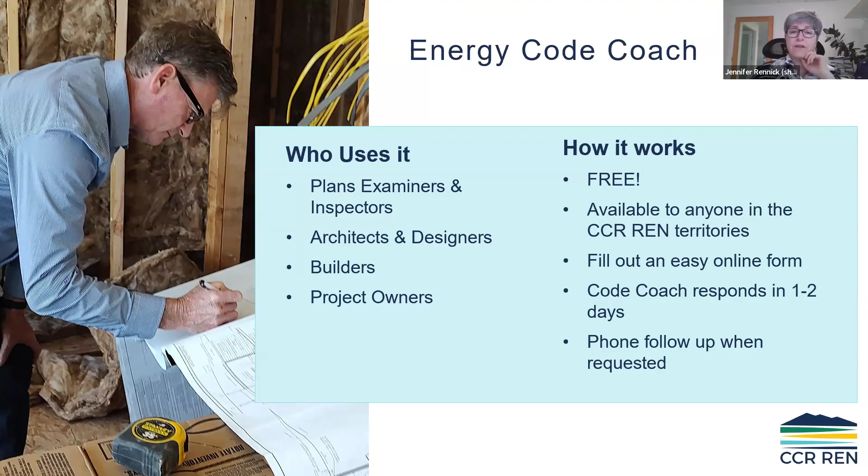Please use it, reach out to us if you have any questions. You'll fill out a form online, that's one way to do it. Then our code coach will respond to you in 1 to 2 days, and we will do a follow-up phone call when requested or needed. At the end of the slide deck, I'll have the website and a reminder of how to reach us through the code coach service.

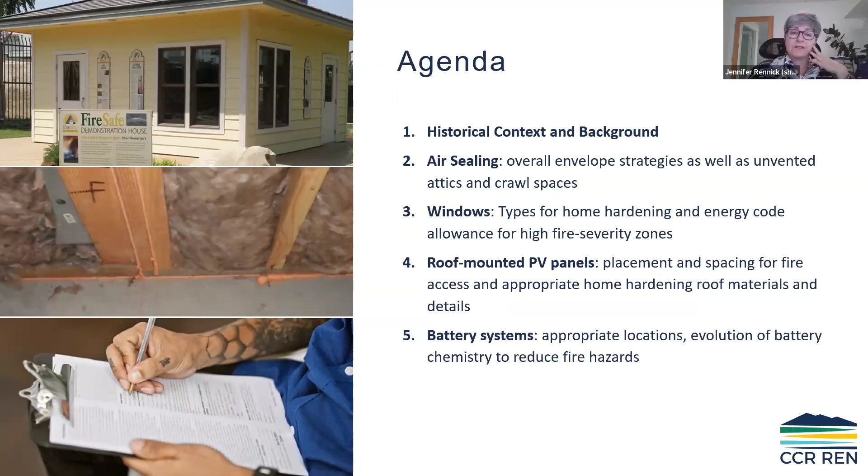With the California building standards, they're labeled as 12 parts right now. As an architect, I use a lot of these codes extensively, but today we'll primarily focus on the energy code. It overlaps a lot with the building code and residential code—with all of them—but there are things specific to fire safety and energy use in the residential code and Part 2, the California Building Code. Part 9 is the California Fire Code, so we'll talk a bit about that.

New to 2025, Part 7 is currently vacant, but there's going to be a new code taking its place where we've taken parts and pieces from all these other codes and put them into one place, hopefully helping us really deal with the wildland urban interface code—specifically for high fire hazard severity zones.

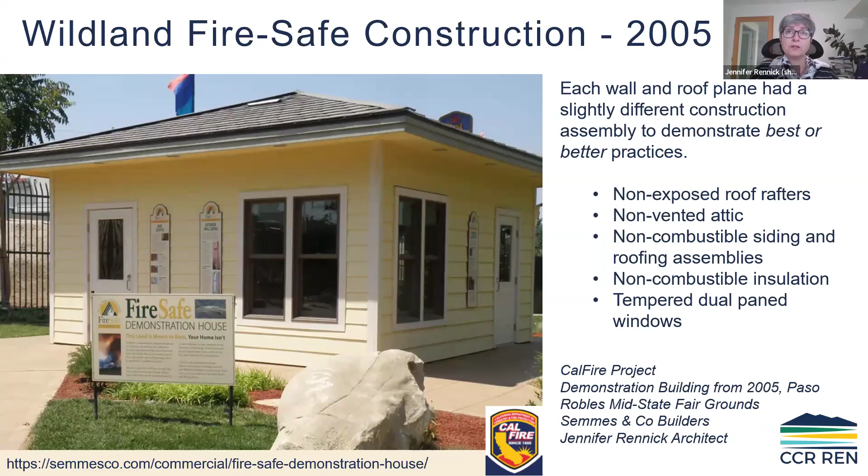Many of those features have been included in projects, but we also learned over the years better ways of building non-vented attic and roof assemblies, which are now actually in Part 2.5 of the code, which we'll touch on in the next few slides.

One of the big takeaways is to avoid thermal bridging, using materials that create thermal barriers. We want to avoid through framing at decks, balconies, and roof rafters coming out, and flash with fire rated products.

We want to use non-combustible materials like fiberglass reinforced exterior gypsum underlayment at metal roofs, and even on exterior walls under siding. You could use stucco and cement board as non-combustible siding.

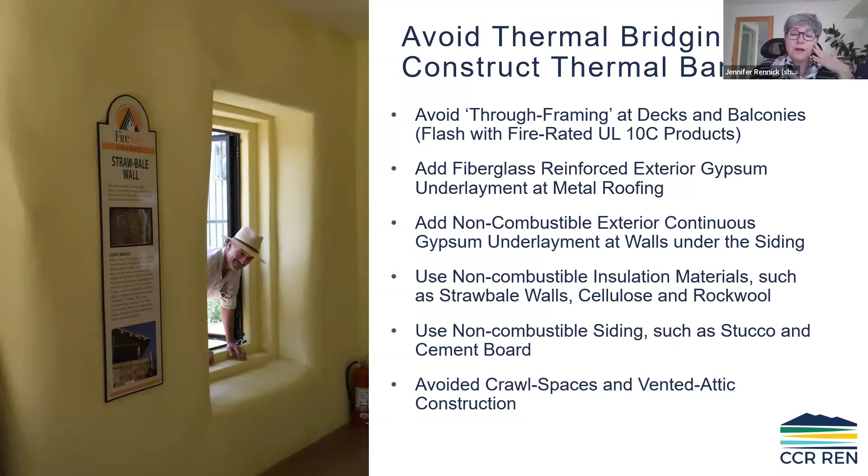We would look at crawl spaces and vented attic construction, avoiding crawl spaces by doing slab on grade construction, as we addressed it back then. We would minimize large vented attics, although you need a vented attic to meet other parts of the code. Since then, we have better tools and better products on the market to vent attics and crawl spaces.

And we've learned that requiring wire mesh of a certain thickness, greater than 1/16 inch diameter, and keeping those screened openings no greater than 1/8 inch in diameter, did a lot to help stop firebrands, which are burning embers, tiny burning embers, from being sucked into these spaces, into our attics and crawl spaces. Vulcan Vent, for example, has come up with products where they've coated the matrix behind the vents with a specialized coating that, when it reaches a high temperature, expands and seals off all of those little openings that allowed for ventilation.

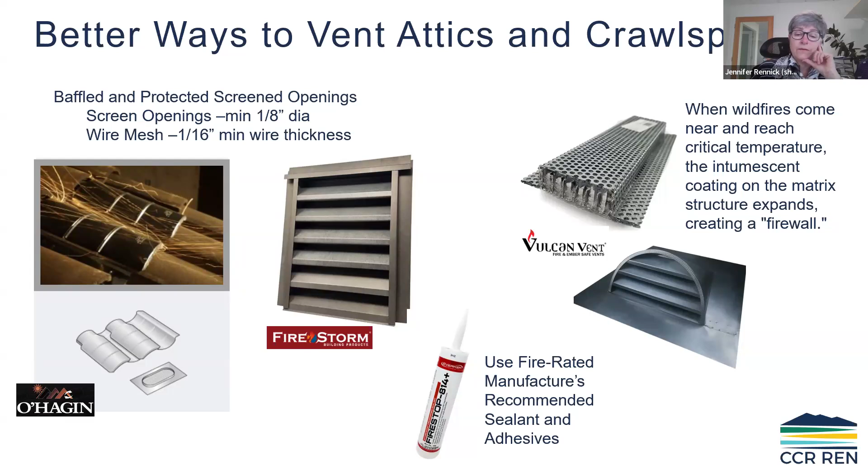So it essentially creates a firewall. And now we have better fire rated sealants and adhesives, and it's recommended that you use those types of sealants and adhesives when you're installing your fire rated ventilation system.

There's also been some improvement for the underlayments for metal roofing. Sheffield Metals has come up with a new product called their titanium underlayment that you roll out under a metal roof. But previously, and this is still valid, you would use a fiber reinforced glass mat, or fiberglass mat type X gypsum product, 5/8 inch, under your roof to get a metal roof a Class A fire rating, or you could use some of these products on the walls just to add another layer of protection for that thermal bridging.

Now, that's kind of the big picture strategy we were using to help stop firebrands from lighting your house on fire. So what this would look like is maybe there's a wildfire, or maybe somebody else's house is on fire, and pieces of their burning house would be caught up in the winds, and those embers can travel very, very far, and they would land on people's roofs.

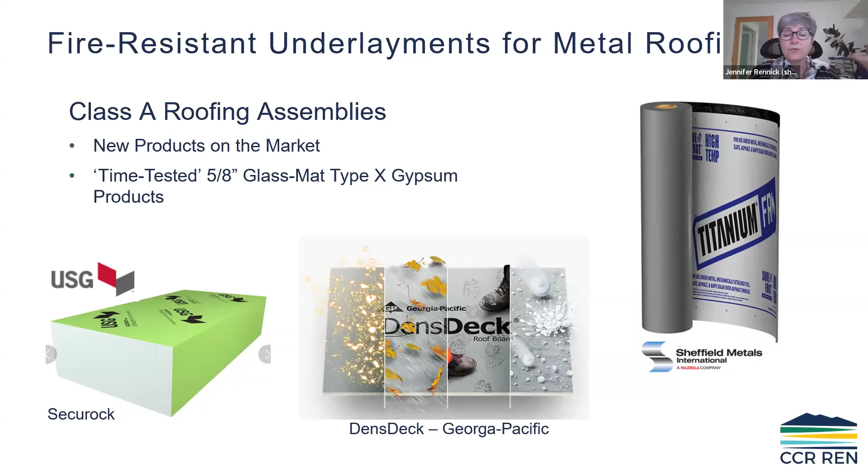And even if the roofing product itself was non-combustible, the heat transfer through that product would catch the wood structure, like the plywood, the wood framing, on fire. It would transfer that heat and start to catch those products on fire without actually having fire go through it. Also, those tiny firebrands could get sucked into the attics or the crawl space, or into the normal kind of cracks, crevices, and gaps in construction that we'd think of back then as normal.

So where that energy code and fire safety start to overlap is air sealing. The energy code got better and better over the years, which meant better insulation and better installation of the insulation, known as quality insulation installation, or QII. And then HERS raters were introduced into the code as well, which in 2025 is going to be called ECC, for Energy Code Compliance Rater, just FYI.

So our HERS raters would come out to a home and do the QII inspection, and some of the things they'd look for is: did the insulation meet the R value, the thermal value, and was the house air sealed? The air barrier, kind of air sealing, has been a part of the code, but really it's only been more recently, with the HERS raters going out and doing on-site verification of the insulation and the air sealing.

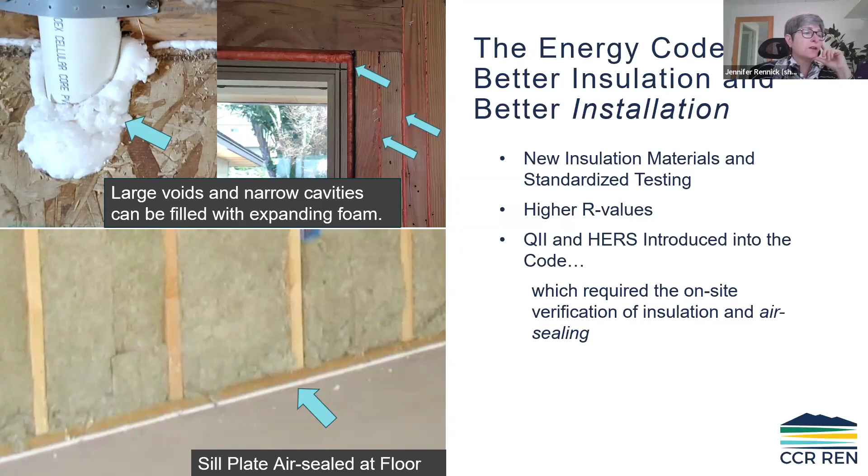So as this conversation's changed for air sealing, we can kind of look at this now in terms of materials, individual materials, or look at it as a whole assembly. And so even though in the code we know a continuous air barrier is needed, a lot of times people say, okay, my drywall taped and sealed, that's my air barrier. Or they might say, okay, I put Tyvek on the outside of the building, but the Tyvek can flap around. It's not really adhered to the rest of the structure.

And each of these individual materials may qualify as the continuous air barrier, but it's really the connection between the different materials that is where we need to really be looking for effective airtightness for our energy code, but also for fire safety.

So embers, because they can enter in gaps as small as an 1/8 inch wide, it's really critical that we start to seal the places where different materials join each other.

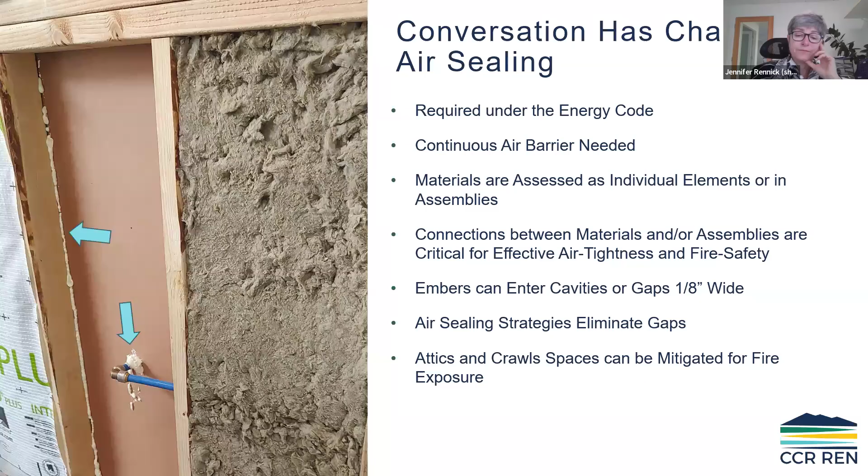Some of the ways we could do that is by foaming the joints between members. So in this photo on the left, you'll see a kind of reddish pink foaming product between the blocking and some of the studs. When it's that reddish pink color, it's a fire rated product.

We want to seal the penetrations when ducts or exhaust fans are penetrating the outside of the envelope. That should also be sealed. And we want to avoid creating framing cavities.

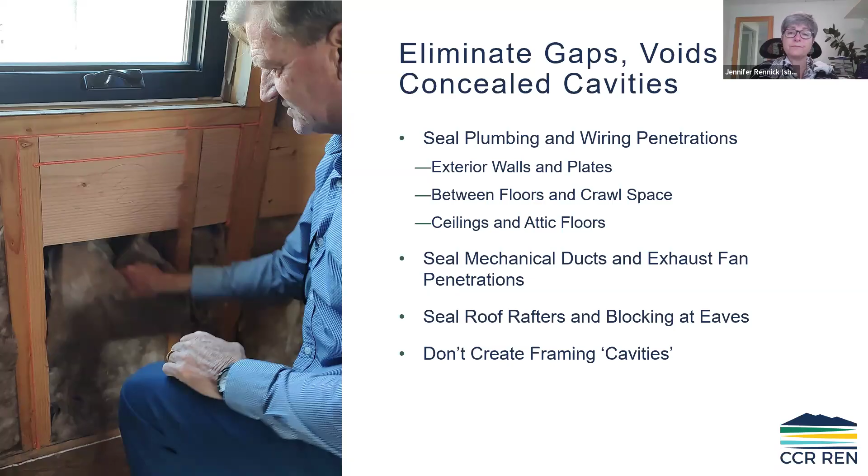So some of those kind of airtight, quote unquote, hotspots that we look for to help with the energy code, but also help with fire safety, is the air barrier on the outside of the building. We like to adhere it to the foundation itself, just below the structural sheathing. There's a few different ways you could do that.

All those seal that classic gap in most people's homes, especially older homes. They have a huge gap where the siding, the plywood, the foundation, and the sill plate all kind of overlap and don't actually meet or create an air barrier. So we try to eliminate that.

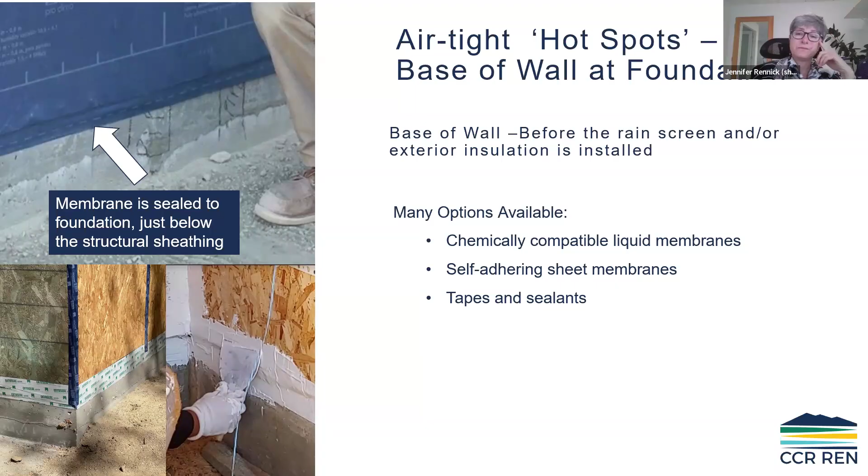Some of the other places that are a hot spot: a lot of times when it comes to drilling through the structure for conduit or wiring and other electrical and ventilation materials, the builder might go in and drill one large hole. One large hole, putting a lot of wires and conduit through it, creates a situation where it's almost impossible to air seal.

A lot of these products are having to go to the outside of the envelope and back into the inside of the building, and so now you've created a situation where there are a lot of gaps. So it's advised to drill individual small holes and then use your fire rated foam sealant and seal each penetration individually.

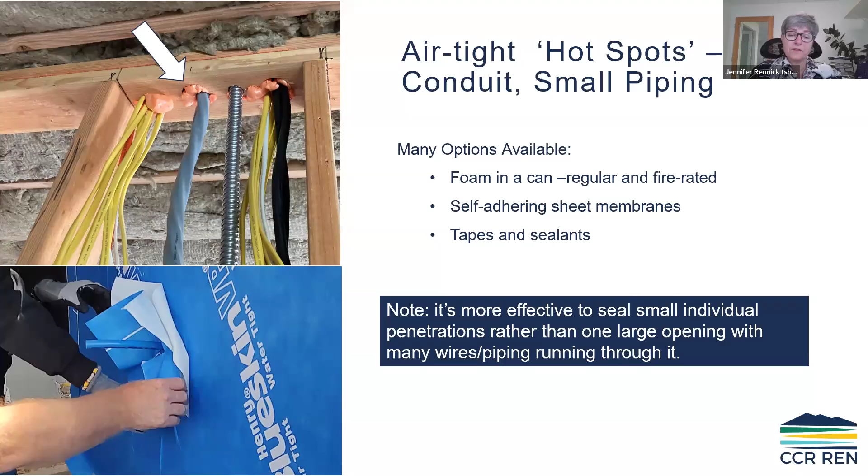There's also specialized self-adhering membranes you can use, and you can cut it properly to seal around the penetrations, or they even make self-adhering gaskets now for some of those. So that's just one way the energy code, trying to improve energy efficiency, overlaps with beneficial features for stopping those air gaps in places where burning embers can be sucked into your house.

Rain screens is something that's come up in the energy code quite a bit. So what does a rain screen do? Yes, it protects from the rain, but really the idea here is that we're holding the siding of a house just a little bit off of the wall. That way, if the siding gets wet, it can dry both to the outside of the house, but also dry to the backside of the siding.

The reason for this is we're trying to minimize a phenomenon that occurs when siding is pressed up against the wall materials. The water can't quite get out, and the wall materials will absorb that water. So for energy and for longevity, creating rain screens is a better way to build, but there's been some concern that now we're creating an air gap behind our siding. What is that? How does that impact fire?

Vulcan Vent, for example, has come up with a heat sensitive strip vent that you can use at the base of that wall. And if you have a siding type where it is also an air barrier, then you can use that type of vent. Some of the folks from Passive House are experimenting with that. We also recommend using non-combustible exterior insulation, or an insulation that isn't going to just quickly catch fire. Rock wool, for example, is a non-combustible exterior continuous insulation product you can use.

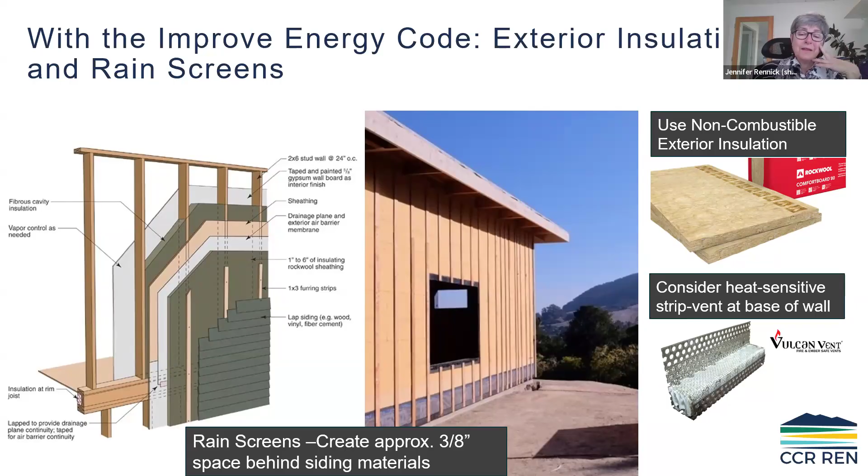One of the big places we're looking to improve fire safety, and we get this a lot, is clients want to use unvented attic assemblies. They just want to avoid the ventilation you need for typical attics, because everyone, quote unquote, knows that's a place where burning embers can be sucked up into the attic, either through gable vents or eave vents.

And we can create unvented attic assemblies. This is a part of construction that overlaps with multiple codes. We have the Title 24 Part 6 Energy Code, which tells us what we have to do for our thermal performance. But we also need to meet Title 19 and Title 24 Part 2 for addressing fire safety and exterior fire exposure. And then, of course, we have Part 2 and Part 2.5 of the building code that actually deals with what's allowable for attics and how to ventilate for them.

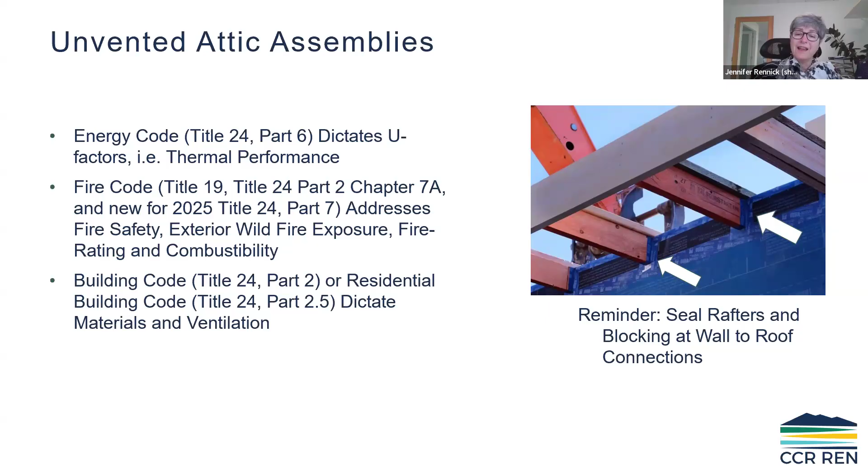That's dealing with the longevity and integrity of the building materials and the attic materials themselves, whereas the energy code is saying you could vent it or not vent it, but either way we're still going to tell you how much insulation you have to use. And then it's the residential code that dictates what type of insulation and how to vent it.

So where these things all overlap is that we're seeing more unvented cathedral rafter assemblies like this, where closed cell spray foam is sprayed on the underside of the roof deck, and then an air permeable cavity insulation is often used, or sometimes now we're seeing that the whole cavity is being filled with spray foam. And then on top of this, which isn't shown, you would have your Class A fire rated roof. That could be your plywood sheathing with a layer of DensDeck and all the other weatherproofing, waterproofing, and a metal roof, for example.

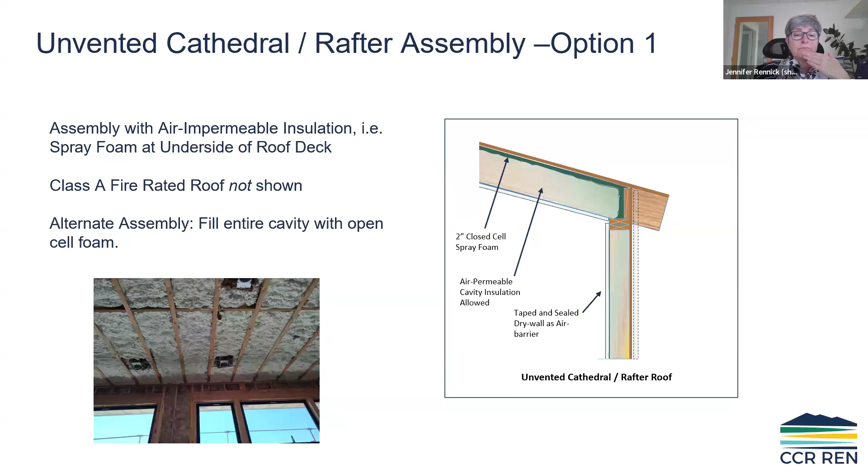The other way we're seeing this, or you could do it per the energy code, is to use continuous exterior insulation on top of the roof deck, or alternatively, you could locate that exterior rigid insulation underneath the roof deck. Again, this would meet your unvented cathedral assembly for building code and for the energy code, but a lot of our clients are really trying to avoid rigid foam insulation up on the roof deck in the first place because of fire.

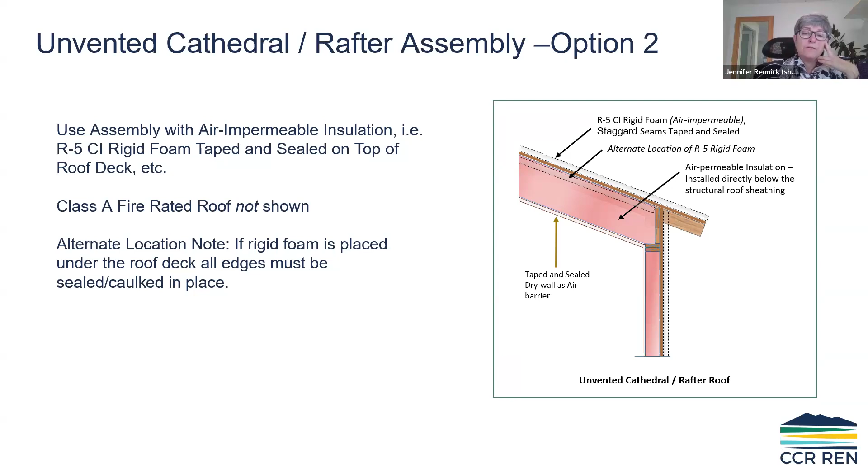So in order to do that, we're starting to look at some unvented attic assemblies that you may not be familiar with. These look like a traditional attic, but the difference is up at the ridge where you'd have gable end or ridge vents or dormer vents — they're not really open. We have a fireproof, airtight, watertight, but vapor-open exterior gypsum sheathing known as vapor ports that cover those openings.

So if you're on the plans examination side, you might start to see some of these. The part of the code that really spells out how you're allowed to do this is actually Part 2.5 of Title 24, in the residential part of the code.

This vapor diffusion port allows trapped vapor inside the attic to escape. It's considered an unvented attic because it doesn't have the openings that let air from inside and outside freely pass. It's kind of a semi-conditioned attic, where the vapor — the moisture in the air that would rot out your roof deck — typically ends up at the ridge, because moist air is more buoyant than dry air, as it turns out. So moisture, especially warm moisture, is going to go up to the ridge of your roof.

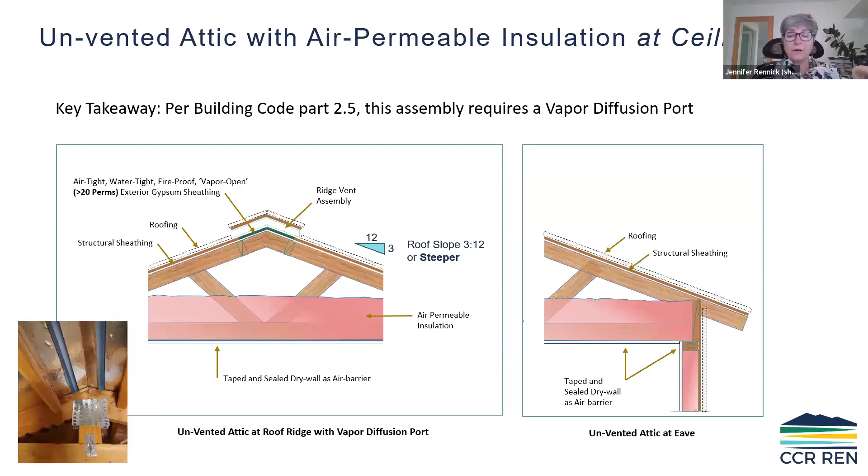If you are choosing to do a type of insulation installation where that air permeable insulation is hugged up against the bottom of the roof deck, then you would also have your vapor ports, covered with a material that allows vapor to get out but keeps embers and fire from coming in. You would also have to do a calculation.

The architect would do a calculation and include some supply air. It's 50 CFM per 1,000 square feet of ceiling area, and a rule of thumb is a 6-inch diameter duct per 1,000 square feet of that ceiling area. So the heating and cooling mechanical system would actually supply air up into the attic.

You might start to see this where I'm working on a project right now where the homeowner wants to do this, and where it gets kind of interesting. If you're on the plans examiner side, if you have a really tall attic space, is that attic space really attic or is it part of the living space? Because what you're going to see is supply air duct go into those parts of the area to complete this picture of how to do it. It's attic space, but you're going to have some supply air.

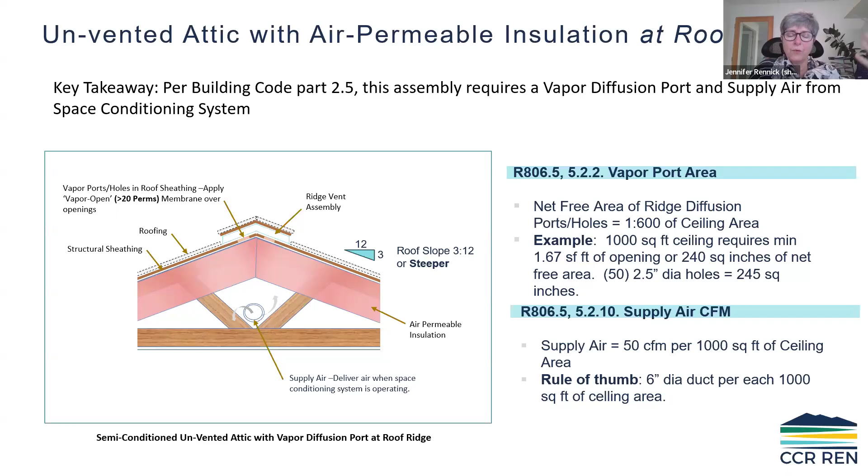For unvented crawl spaces, these are kind of considered semi-conditioned spaces, and really the two things to keep in mind is that you're going to have a vapor barrier over that exposed earth or grade, and you're going to need that vapor barrier sealed around at the edges.

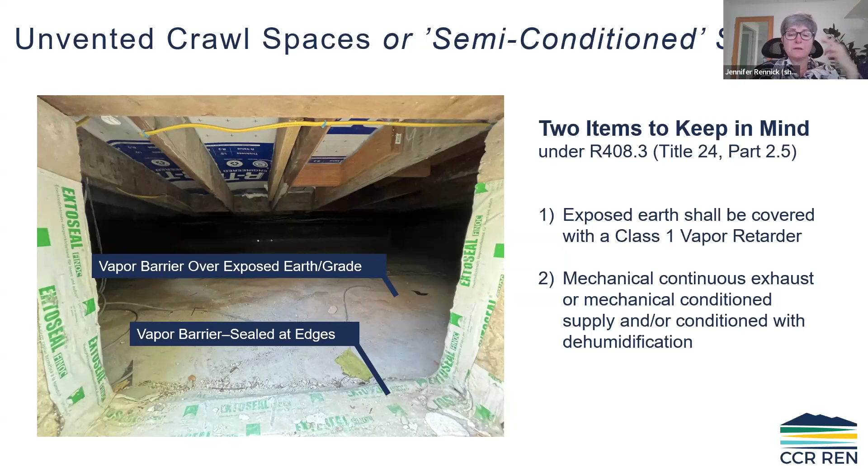This is an example of a photo of a retrofit converting an existing home to an unvented crawl space. You do need some kind of mechanical continuous exhaust or mechanical conditioned supply and/or conditioned with dehumidification. So again, it's kind of a semi-conditioned space, similar to what we're looking at for the attic.

In new construction, it's much easier. Before you add that floor, you could get in there and put down that class 1 vapor barrier, and you can use specialized tapes to seal the vapor barrier to the foundation and to itself, and lap your sheets 6 inches minimum, creating a space that won't allow vapor drive from the earth up into that space under the crawl space.

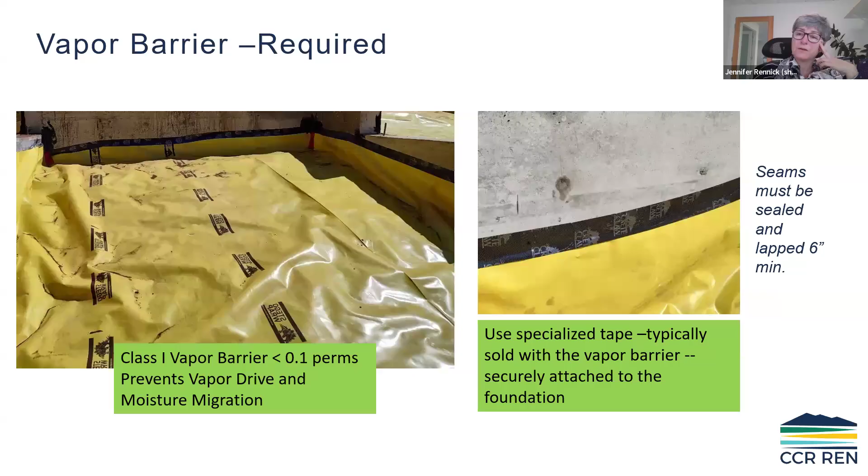So the vapor mitigation is for the longevity of the structure itself. It also helps with meeting your energy code requirements, and having an unvented crawl space further fire hardens your house against embers and hot air coming up into the crawl space and catching your floor on fire.

All right, with windows, there's been a bit going on with the energy code. Right now the energy code is going to dictate the thermal performance of the window. As a reminder, if you're new to this, the U factor is how we rate the windows.

The smaller the U factor, the better the window is against heat transfer. Just about all brands of windows now have dual pane and triple pane glazings. Under the 2025 energy code that's coming up, these U factors are dropping a bit for certain climate zones. For climate zone 16 and climate zones 1, 2, 3, 4, 5, all of those climate zones are going to have a slightly smaller U factor for their windows, 0.27.

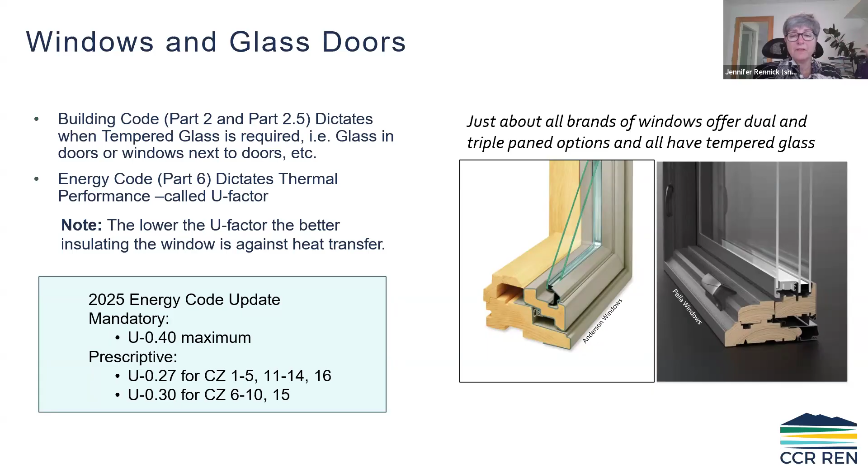And then the maximum you're allowed to have is a 0.40, and that's just kind of your mandatory maximum. So if you do a computer performance model, you can have windows that don't perform as well as that prescriptive requirement, but you have to show other places in the building that save energy.

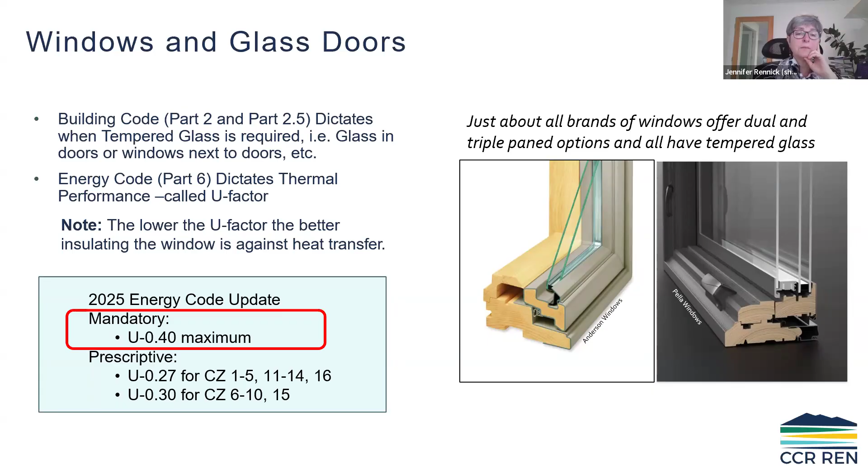So it's this mandatory 0.40 maximum now that's got some people a little concerned, because as it turns out, most of the fire rated windows that you might want to use if you're in a high fire hazard zone is 0.42. So it's greater than the maximum.

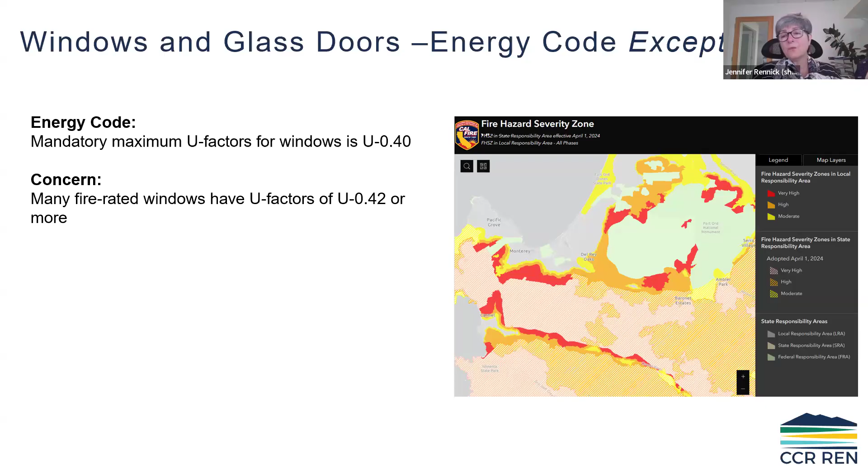So now you've got to find windows that are meeting the maximum, and you still want to have a well-performing house with good quality windows. So now there is going to be a new exception in Part 7 of the code for the wildland urban interface, where the U factor for windows and skylights installed in a building, if they're located there, you'll be able to take this exception for that mandatory U factor.

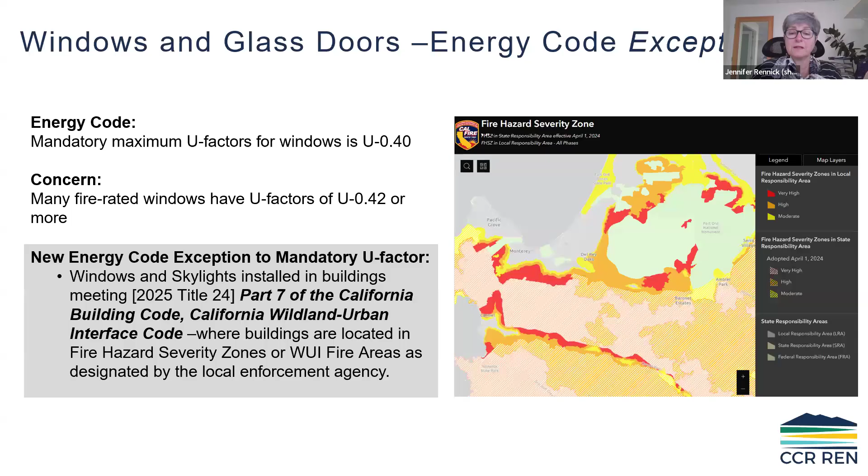So it kind of opens you up to more window brands with this exception. Now, certain window brands are working diligently to come up with fire rated windows that also are better thermally performing.

Right now, if you want to learn more about which products in general are meeting these requirements, you'll want to pull the most recent version of the State Fire Marshal listed Wildland Urban Interface Products Handbook. Last time I looked it up, there were just two brands of windows meeting these requirements: one, the Riviera Bronze for residential construction, a thermally broken steel frame that was meeting these requirements, and then one brand for commercial windows.

Long story short, even if you're not going to take that exception, you're wanting to use dual or triple paned windows that have thermally broken frames, typically steel, and tempered glass with the inboard and outboard panes tempered. And if you can't do that, at least you know you can do one or the other. For some brands of windows now, they're offering a dual paned unit that gives you all your thermal performance and air sealing, but they're now creating a third outboard pane that is tempered glass.

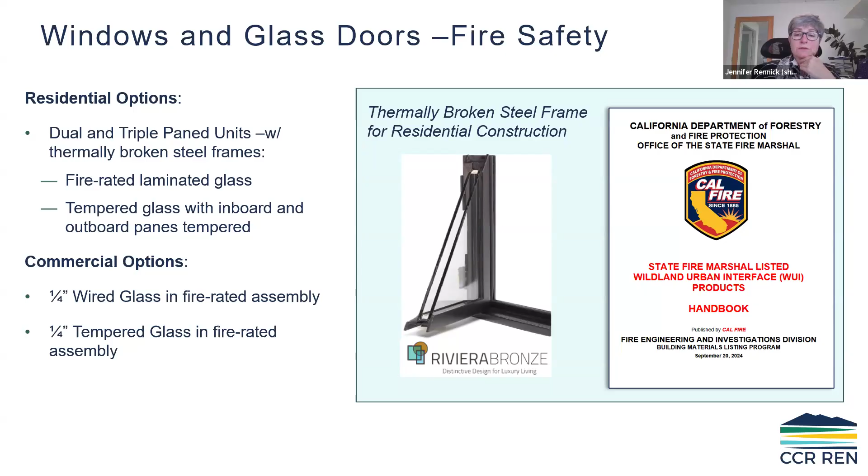I was just taking a look at those windows, and I'm seeing that more than one brand now is starting to come out with those. So keep an eye out for that.

And I probably mentioned the reason for the tempered glass is because in a high fire, high heat situation, when the glass breaks, you don't want shards of sharp glass everywhere. So the tempered glass is going to break into small pieces. Also, the more panes of glass and the thermally broken steel frames, the frames aren't going to melt so readily, and it's just going to slow down the fire. But eventually, windows are a weak link in the whole fire safety. The idea is to give the occupants more time to get out in case of a fire.

So when it comes to solar battery, for high-rise and non-residential structures, we are seeing an expansion under the 2025 code of the occupancy types that are going to be required to have photovoltaics and or batteries. Some of these occupancy types will increase a lot. For example, restaurants in the past, under the 2022 current code, just had a small amount of PV required. Now there's going to be quite a bit of PV required for restaurants because of electric ready kitchen requirements, so more going towards more electric and hence more PVs.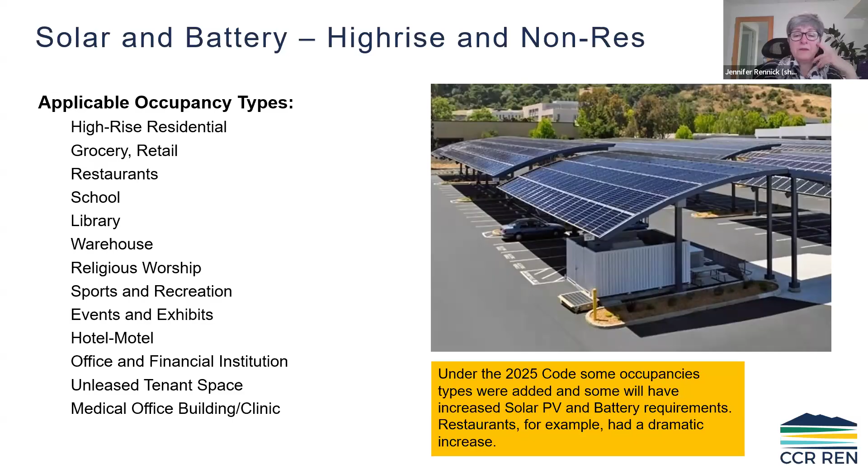So what does this mean in terms of fire and fire safety? The panels that are on the roof need to meet our fire code. How we access all the equipment on the roof is dictated by our fire code and our building code. And then, of course, structurally, we have to have the roofs be able to support the equipment plus the firefighters. We have to make sure the walkways around all of this are clear from trip hazards and obstructions, and that includes the PV system conduit and the raceways, and how we design this with the ridges and the hips or valleys and a juncture to outside parapet walls.

All that now is being addressed under the building codes, the fire codes, and all those different parts of Title 24 kind of culminate. So one good thing about the 2025 code coming up is there's a lot more unity and kind of saying the same message in the different parts of the code. So there's more agreement, which makes it easier.

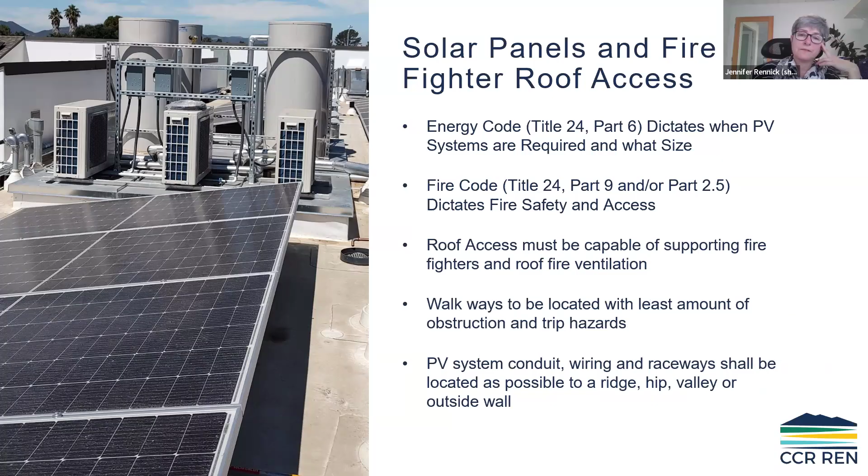For our non-res and the R3 - R3 is single family homes, but there's a component of single family homes that can also be used for caretaker facilities, or long-term care, non-transient housing, that kind of thing. So for part 9, chapter 12 of the fire code, if it is a residential occupancy, we're going to have 3-foot wide walkways around the PV system. The other non-res occupancies would go up to 6-foot wide perimeter walkway, and otherwise 4-foot wide for the interior walkways.

And then there's some basic things that we would be looking for as designers, but then plans examiners, your fire code enforcement person, they're going to be looking for 4-foot clearances around roof accesses, skylights, smoke hatches, etc. It's also really important as architects, as designers, that we make sure we're not showing future location for PV panels located below an egress or an egress pathway.

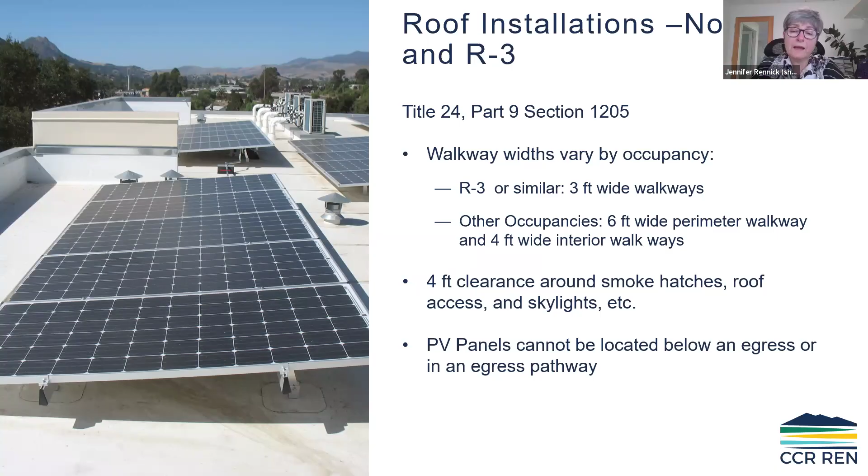So it just adds another layer of responsibility, basically another layer of building design integration when we look at our energy systems combined with fire safety and working with our mechanical and electrical engineers.

For straight up single family residential construction, that's part 2.5 of the code. We're typically going to see 3-foot wide walkways in general, but there are some exceptions now where if you have 33% PV roof coverage, you're allowed an 18-inch wide walkway on either side of a ridge. But if you've got more than 33% of your roof covered with PVs, you're going to need a 36-inch or 3-foot wide walkway on each side of a ridge.

And then there are also some exceptions if the home has qualifying fire sprinklers. Again, the PV panels, or future PV panels, can't be located below an egress or egress pathway. So some of these things, when it comes to roof installations of our PV systems, are fairly straightforward and haven't changed a whole lot over the years. We just have to be mindful that the PV system itself doesn't contribute to hindering firefighters or people getting in and out of the building.

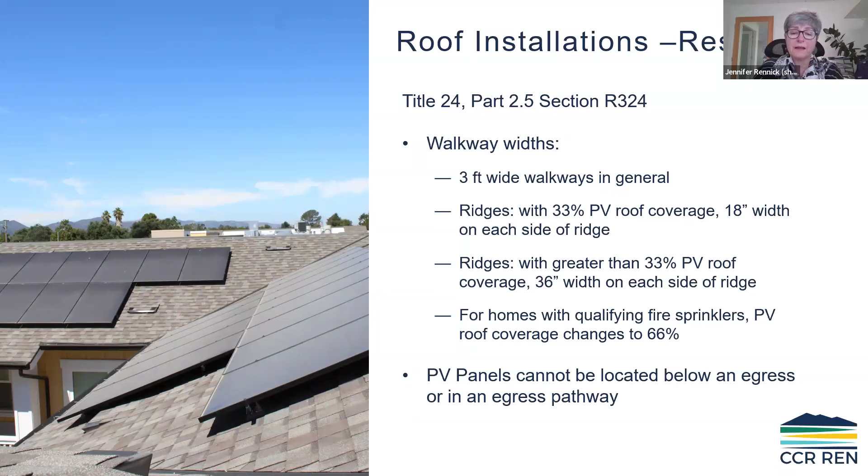So for the electrical energy storage battery systems, also called energy storage systems, ESS, or battery energy storage systems, BESS, you're going to see those words used interchangeably.

What we're talking about specifically is two things. One, more and more folks have portable batteries that are maybe part of a scooter or an e-bike, and those have fire safety hazards. Be mindful of that as a person who uses buildings, to be really careful what battery chemistry you have, and to make sure your batteries are in good shape.

And then there are the stationary batteries that are part of your energy system. For residential construction, you might be using it for resiliency in case of a power outage. And then for non-residential occupancies, you might be required to install a battery system as part of the energy package, part of the Title 24 Part 6 Energy Code. Each of these has certain implications with fire safety.

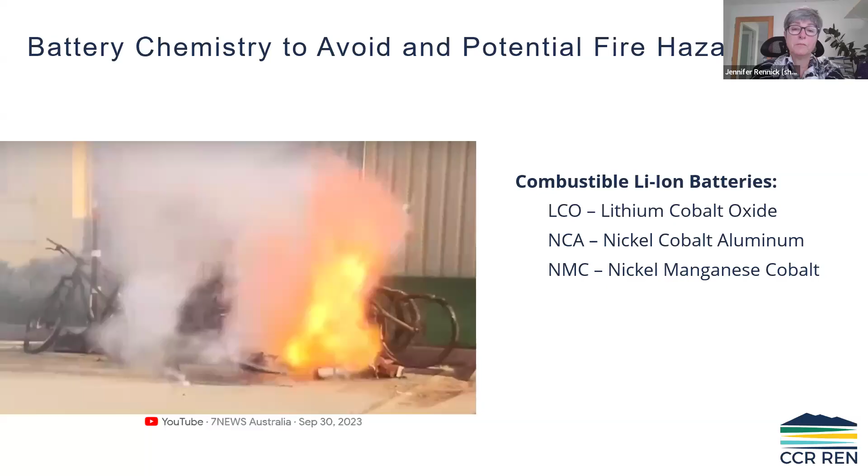But not all lithium batteries are the same. Typically we'd have that lithium NMC type of battery chemistry. LG Chem was using that chemistry starting in 2016, and around 2019 it got implicated for starting home fires. Then there was a big recall in 2020 and 2021, and LG moved away from that battery chemistry.

Tesla was using that battery chemistry for their Powerwall, but now the Powerwall 3, for example, has moved away from that chemistry. So a lot of brands now are moving towards lithium iron phosphate chemistry, which is non-combustible, has a high power density, and is cobalt free. That's good news. Same with lithium titanate oxide - also non-combustible and cobalt free. So that's kind of the good news when you're buying batteries now.

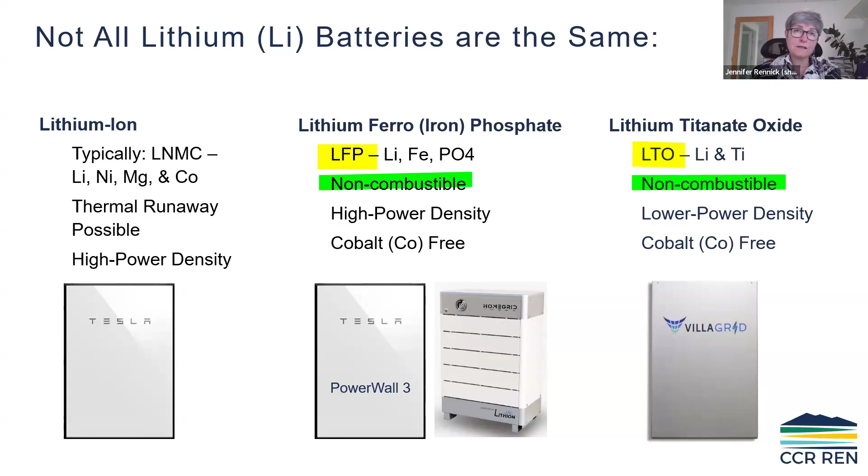Existing batteries are still out there, so you've got to be mindful, but the new battery chemistry is shifting. On the horizon in the US are sodium ion batteries, also non-combustible, and a lot of the materials in them are readily available. Same with some zinc ion batteries, also non-combustible. The difference with these two battery types right now is that they have a lower power density than lithium ion. But if they're just sitting at your house, it's not such a big deal if the power density isn't as high, and it's probably a lot better that they're non-combustible and a little more environmentally friendly.

Now, the battery chemistry does dictate the allowable battery size. Currently, under the 2022 code, they don't differentiate - that's just all lithium ion batteries. Each of those units can only be 20 kilowatt hour rated energy capacity per battery, and then you can have larger size batteries allowed with hazard mitigation analysis. So that's what we're looking at for, say, a multifamily housing project that wants to use batteries - then we're going to be moving towards a hazard mitigation analysis.

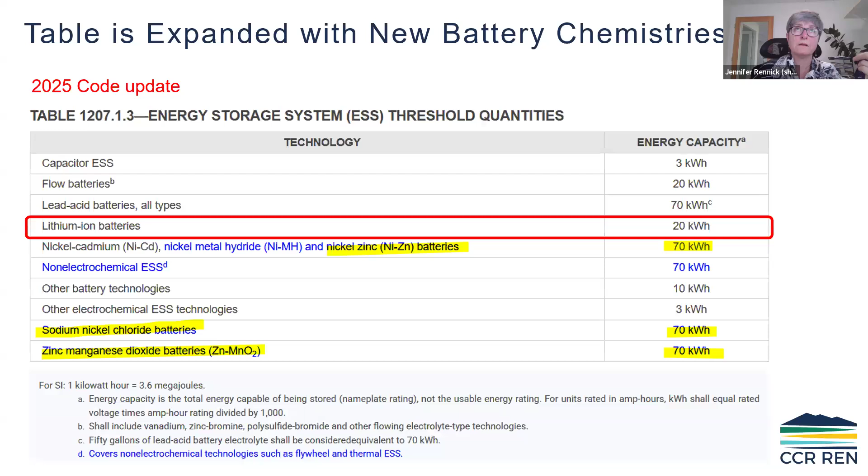But with the new sodium and zinc battery chemistries coming on board, they have the ability now to make these into larger sized units because it's reflecting the new battery chemistries that are coming on board. So that'll be in the code that takes effect January 1st, 2026.

If you're working on large scale battery energy storage, you will have a hazard mitigation plan requirement. So this is something, if you're on the plans examination side, this is where a lot of these things are going to be spelled out by the battery consultant.

Like a multifamily project we're working on now, for example, Climate Zone 3, it's more towards the coast of our CCR REN region. That battery consultant is working with the architect and the other engineers and the energy consultants to pull together the whole plan, show where the batteries are going to be located. They are using weatherproof self-contained units with fire suppression, for example.

And also we're going to make sure that there's clearances from the other structures. So typically, the code requirement is 10 feet. There's got to be clearances above, behind it, the front and side to side, and also just the ability to access these. And of course, you have to protect them from fire protection, from vehicles - so there's bollards that will be in place.

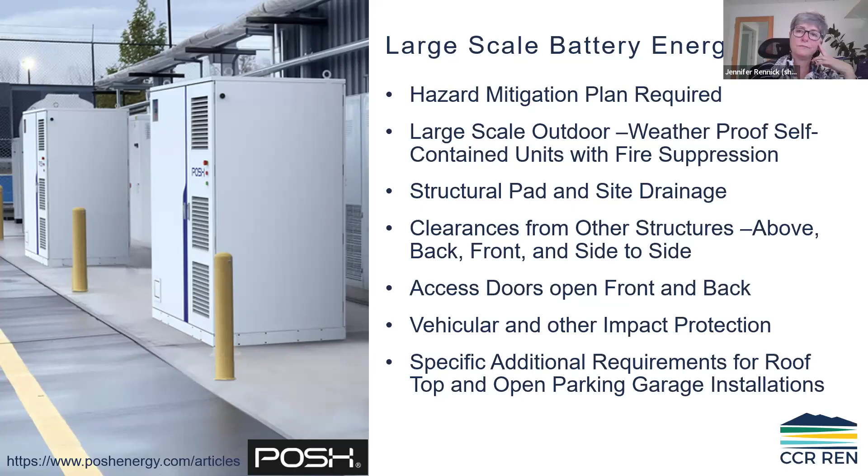So an example of the size of this, just to give you an idea, a lot of them are around 7 feet tall. Many of them are 6 feet wide, although I've seen some as narrow as 4 feet and some even wider than 6 feet. But these are standalone, self-contained - all the electronics and the batteries are all built in, but you do need access in front of the unit because these doors open on the front, and you also have a set of double doors that open typically on the back.

And then there are requirements for how close these units can be to each other based on their chemistry. So a lot of that's changing under the 2025 code, where they're taking the battery chemistries into play and then also just spelling out a little bit more about what that needs to look like.

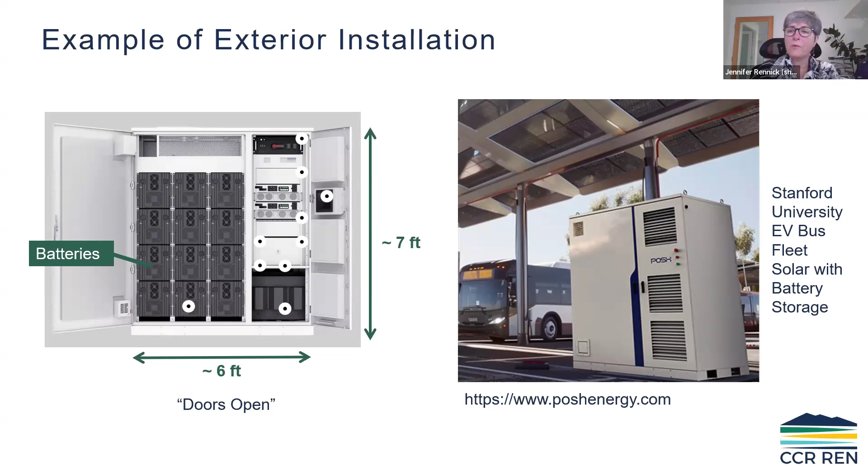Currently, the code is actually calling out what you have to put on the construction documents for batteries. So I put this in here too for architects, but also for folks who are just interested to know really what goes into the plans and how our fire safety and our energy code are overlapping and working together on this.

So kind of the main takeaway from this is, yes, you have to have construction documents that show the location, the layout, the rated assemblies, the type, the manufacturer specifications, the details on your fire suppression and your thermal management, the ventilation, and if the systems need exhaust or special kind of venting. And then there has to be a commissioning plan with it and a decommissioning plan so that we know what the end of life is going to be for the batteries.

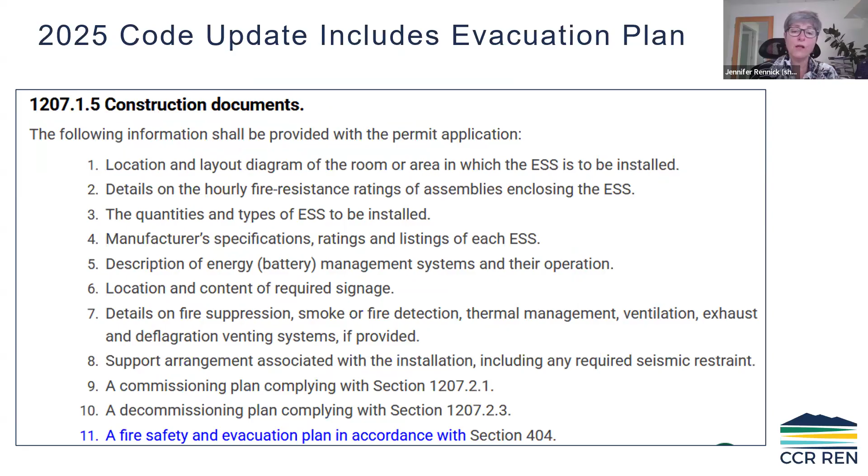And then in the 2025 code update, they've now included item number 11, a fire safety and evacuation plan that's in accordance with the fire code. So that's all now required when you have the batteries. For the small scale battery system - small scale meaning each battery unit's less than the 20 kilowatt hour size, typical of the lithium ion batteries - you can have them indoors or outdoors.

They can be ground mounted or wall mounted. You do need to protect them from damage, and you're going to want to place them where they're protected from temperature extremes. Although with the new lithium and other battery chemistries, that's not quite as critical, but it's still a good idea

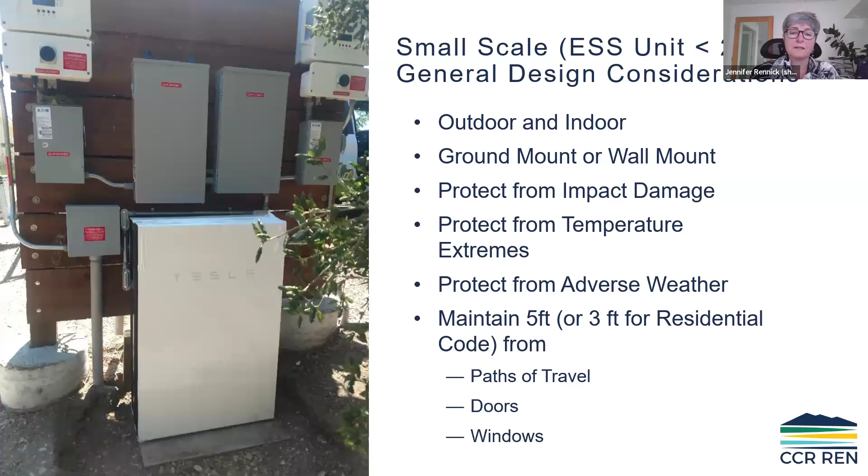to protect from climate extremes and adverse weather. And then generally, under the residential code, you need a 3 foot separation for paths of travel, 3 feet from doors and windows. But otherwise, for your other residential occupancies, multifamily and non-res, you're going to want to have 5 foot distance between the path of travel, doors and windows, and your batteries.

And then the batteries themselves can typically be separated only 3 feet from each other, but they can be closer together if the authority having jurisdiction says yes, the battery system meets the proper fire testing and the battery manufacturer specified their minimum distance. So they can be closer than 3 feet.

So right now under the residential code, even though each of the individual units would be a 20 kilowatt hour sized battery, in the aggregate you can't have altogether more than 80 kilowatt hours on an exterior wall or in your outdoor installation. So if you had a unit approaching that 20 kilowatt hour size, you could only have 4 batteries altogether. Some homes want a lot of batteries, others are not installing that much, but there is a limit.

And that's all part of the fire safety, that was the idea. It also dictates that if you do have that battery inside in a utility closet or inside your storage space, or in your garage, you have to have 5/8 inch gypsum type X for the ceilings and the walls, all part of the fire safety. That's how we build a residential garage - you would use that type X 5/8 inch at the walls and ceiling anyway. So now the utility closet or that space for the batteries would also have that type of construction.

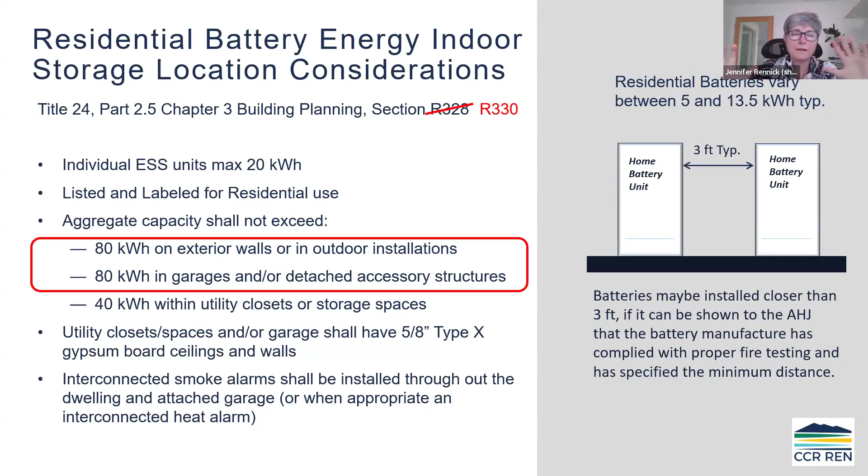Okay, the new code is going to be referencing R section instead of section R328. It's just R for Residential, 330. They've changed the numbers a little bit to make it a little easier to follow in the logical order for chapter 3 of part 2.5.

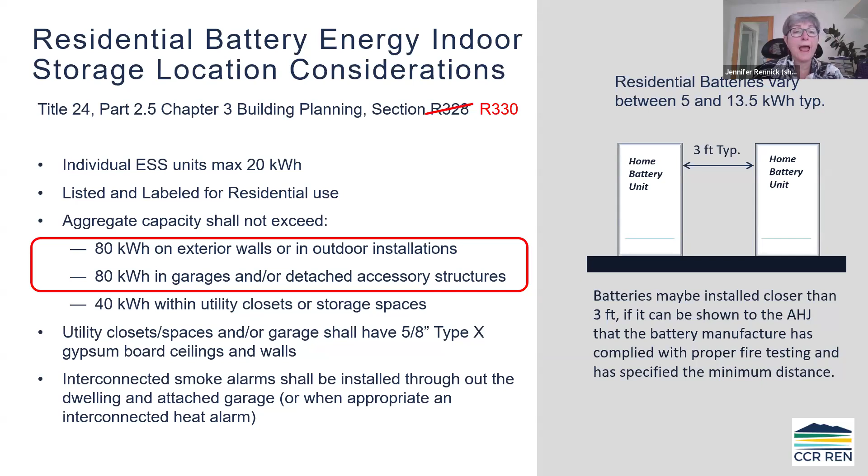Okay, so 80 kilowatt hour on exterior wall aggregate - that's the same for garages, detached accessory structures - but now under the 2024 supplemental and the 2025 code update, those things have gotten larger.

So now if you're on or within 3 feet of exterior walls, attached garage, you can go up to 100 kWh in aggregate rating. And there's something interesting here where they're saying, okay, but if you use exterior walls and eaves that are constructed with non-combustible surfaces - and then they define non-combustible surfaces and the dimensions and measurements of how far that non-combustible surface has to extend beyond your battery - then you can double your maximum aggregate rating on top of that. So you're up to 200 kilowatt hours.

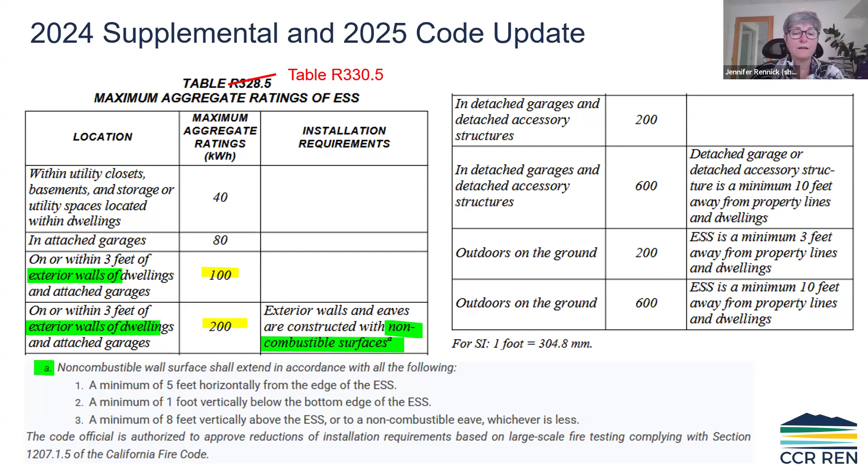So really the big takeaway here is the code is realizing that if you do things to mitigate for fire, you can have more battery storage allowable on site.

And then the same kind of thing where the maximum aggregate now is going up to 600 kWh, kilowatt hour capacity. And then you would meet these kind of requirements of distance from property lines and distance from other dwellings. And then also new to the code is

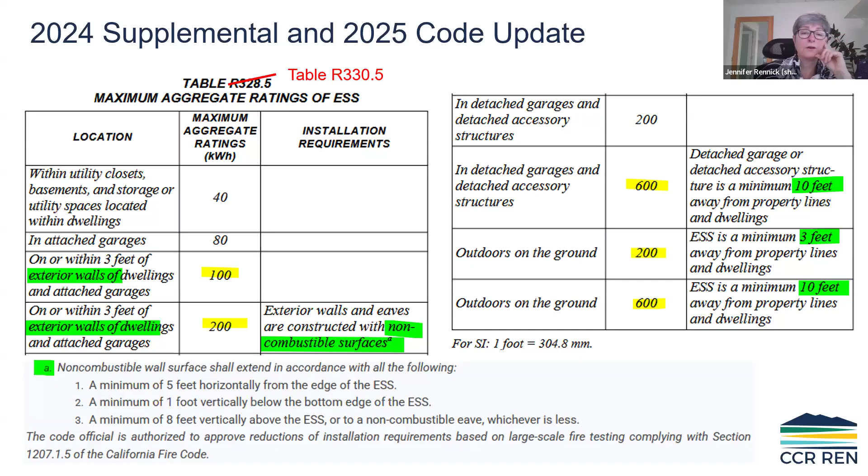additional information. If you do install the batteries near and around vehicles where vehicles could be, then there's additional requirements, because it turns out that especially with some of the older lithium ion battery chemistries, impact can cause the batteries to burst into flames. So keeping safe from vehicles is a major concern.

And so there's these additional requirements that you should read up on, especially if you're an architect and you're trying to design for the battery to be located in and around vehicles. What we're seeing commonly is a lot of the designers we're working with are just avoiding it altogether and putting it on the outside of walls, away from cars, using non-combustible exterior wall and eave materials anyway, and calling it good. That's probably the most straightforward way, but it's not always an option, like for our multifamily projects.

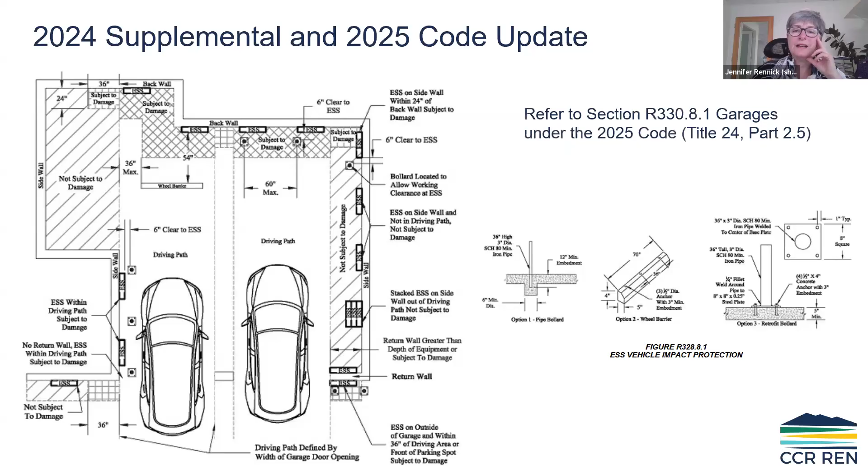And then, oh, go ahead. Did someone have a question?

There was one question that came in asking if there are any exceptions with fire sprinklers in the garage for batteries.

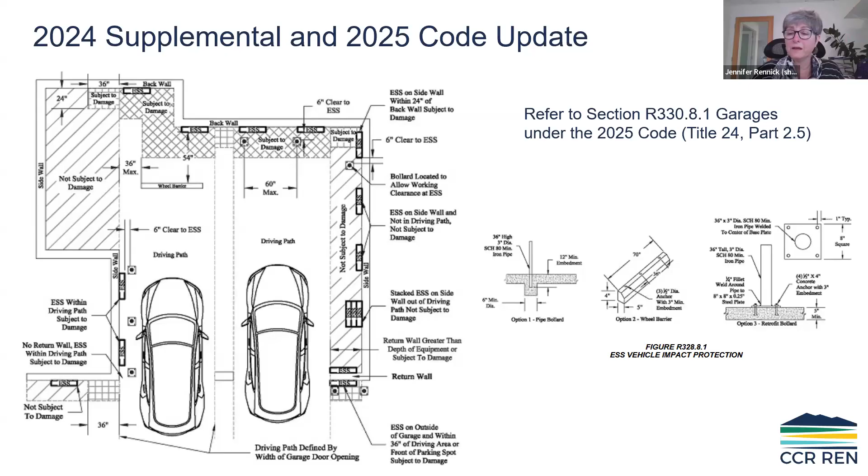There's fire suppression requirements for garages and enclosed structures, but it doesn't give you exceptions to mitigate for car impact, for example, and it doesn't mitigate that you would still want to use your 5/8 inch type X gypsum construction. But what it changes, if I'm recalling correctly, is some of the other requirements for distance between certain objects in the batteries. But that's a good question, and I can look it up more, and we can probably dig into it a little bit after we're done. We'll have a little bit more time.

This is a picture, just an example of an exterior installation. Like I was saying, a lot of the projects we see are just non-combustible siding. They're using the separation between the batteries under the current code, so 3 feet unless otherwise noted by the authority having jurisdiction.

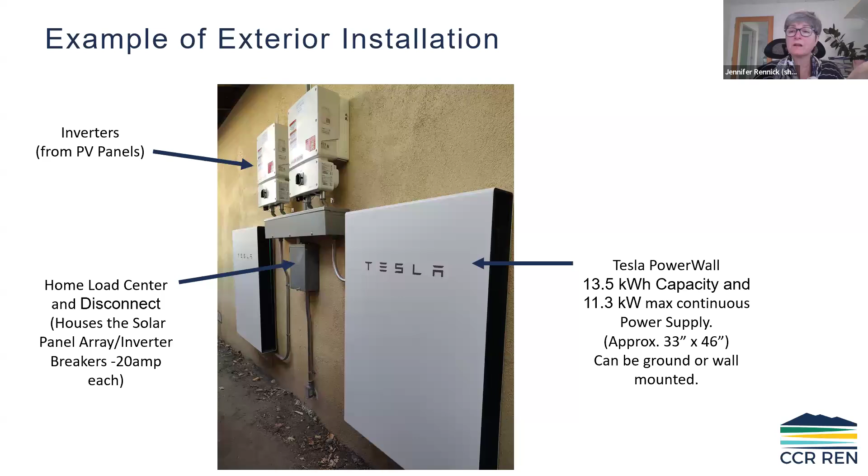This gives you an idea of what all that looks like with your power wall, the inverters coming from the PV system. You'll have a home load center or a disconnect that's within sight of the batteries, so you can shut the whole system down.

And then the other components that go along with the typical installation is a gateway, or depending on the brand, sometimes they'll refer to it as their gateway, but it's a transfer/isolation equipment. The purpose is to isolate the building from the electrical grid during a power outage. So that goes in between your batteries and then your electric panels.

And then what you're going to see by code for residential is you would have a 225 amp main panel, because that's what's required now. And then you would have a sub panel that has your backup loads. Right now, the energy code dictates that backup panel would have 4 branch circuits at a minimum. In this particular case, the whole house is backed up, so the panel's relatively large, but it could be a smaller panel with only the 4 branch circuits.

And it's dictated in the code what those 4 branch circuits would monitor, and that way the home has greater resiliency. And then under the energy code, if it's new construction, you get extra credit on your performance report.

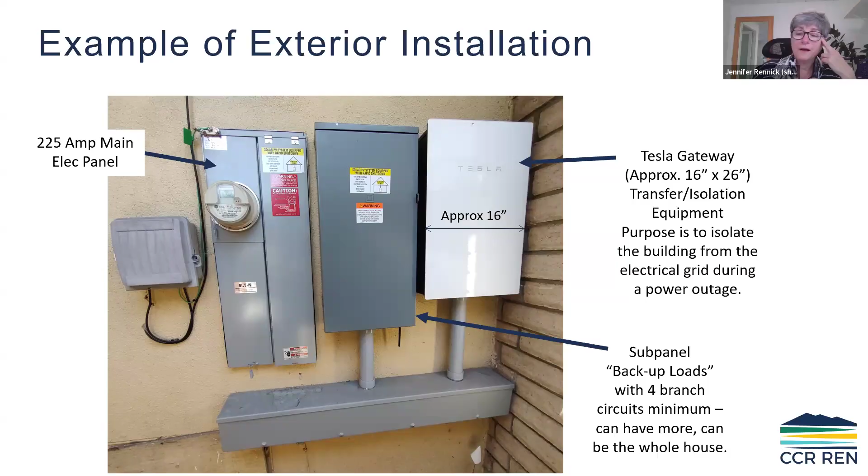Okay, so, had, oh yeah, go ahead. No, go. We had another question come in. I just got 2 Powerwall 3s and wasn't required to have them mounted 3 feet apart. Is that because the 3s are non-combustible?

Yeah, the new Powerwall 3s are the lithium iron phosphate chemistry, so non-combustible. The Powerwall 3s have moved to that battery chemistry, and a lot of the battery manufacturers are moving away from the combustible chemistry. And then someone said it was manufacturer specification, right? Because there were certain batteries where they proved, via the requirements of the fire code and high fire situation testing, that when their batteries were together, they could be closer together without one battery catching the other on fire. So then your authority having jurisdiction could agree that they could be closer together.